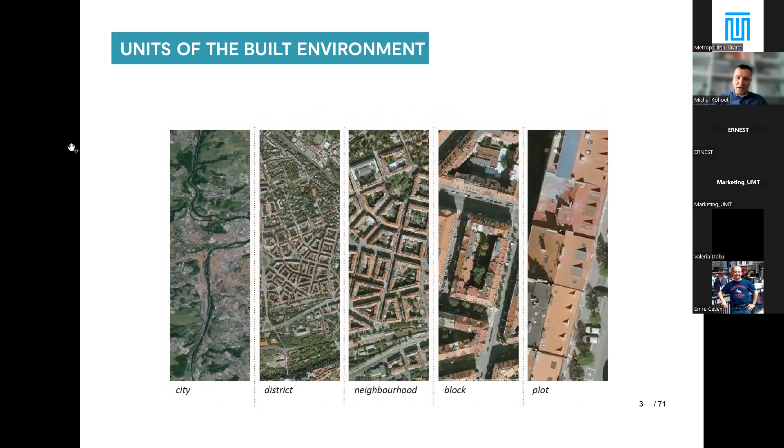But you can also see these lots, blocks, or these units not only as units from which the city is assembled, but also as scale levels of the environment, where the elements and themes of the environment are permeating all these levels, and different things are actually happening on these levels.

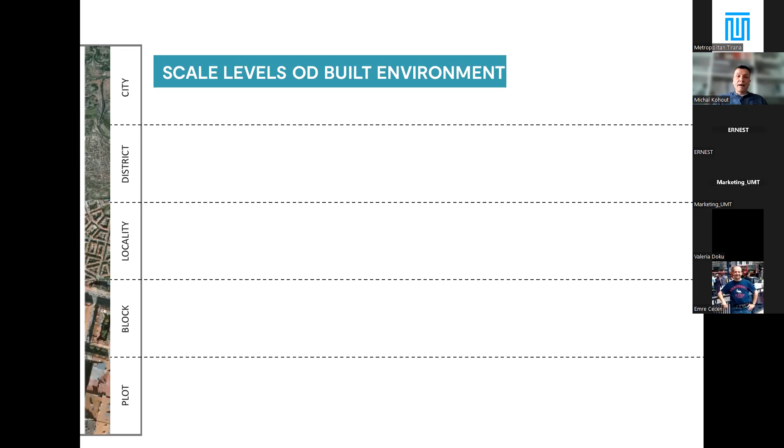So we can say that the elements from which the city is assembled are not only these units, but also some layers, and probably the most important layer of the city would be the public spaces. Then there is the building mass, civic amenities, all the infrastructural and mobility facilities, landscape, transportation. That would be kind of the primary.

You can, of course, come up with many other layers, many things and themes which are happening in the city, but those would be the primary if we are talking about planning. And then just to explain how different processes are happening at the different layers.

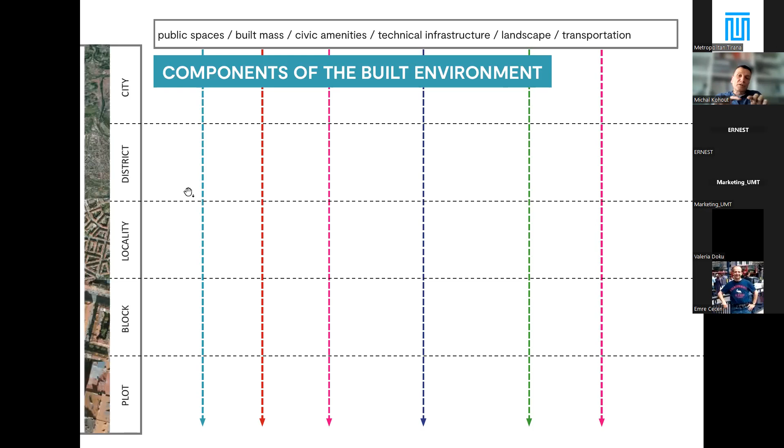I will show you, for instance, what could happen on the level of the district if we are talking of the public spaces. On the level of district, there would be some general idea being conceived, and then the establishment of the general street network in the sense of patterns, not really of individual spaces. And maybe there would be a spatial delimitation of the key public spaces, so it's really somewhat like a general concept.

And then if we go down to the level of locality, that's actually where the spatial delimitation of the basic street space is happening. And so that was a process which we already might call a description.

And there is maybe we are setting like the secondary permeability of the blocks. So basically at this level, there is a sort of general description and delimitation of the public spaces happening. And then one level further down, at the level of the block, we can already speak about certain parametrization of the public space and delimitation maybe of the inner block public spaces, if some of them are public. And we can already talk about how the secondary permeability of the blocks is actually happening.

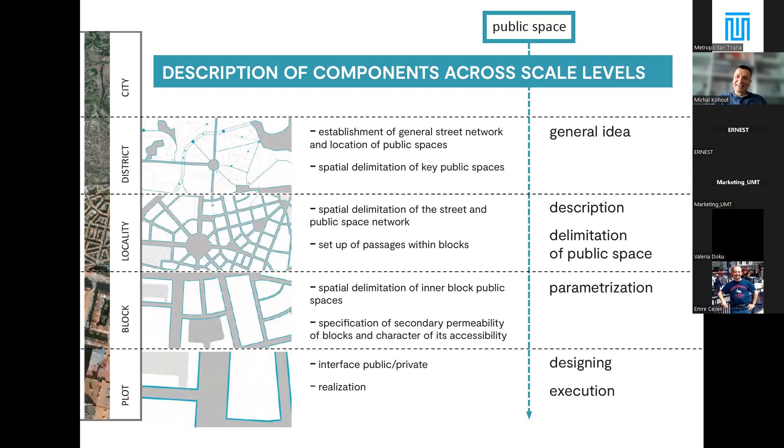And I will just show two examples of two different periods of the city development of Prague, where this mixture of these processes had a different balance, and there was clearly a different result. So one period is the first half of the 20th century, as I was talking about earlier, which I would call a coordinated development, where most of what we call a compact city was developed. Prague has a really unusually big historical core, that's what we inherited from the periods before the 19th century. But still, this period creates the bulk of the city, and we call it compact city.

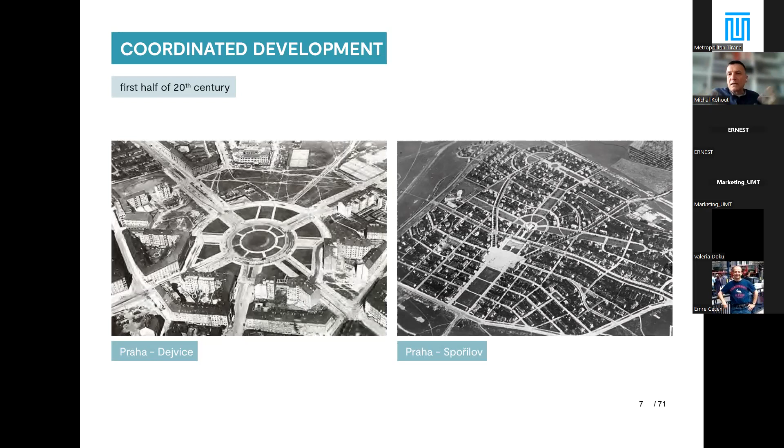And basically, the system worked in a way that the public authorities were the main development driver. They bought out the land, they designed the public spaces, they developed the infrastructure, and then they divided the land into what would remain as public spaces and what would be the buildable blocks, and they divided the buildable blocks, created different parcels, and they sold off parcels.

And that's basically how the city expanded, but also how it made money, and also how it formed itself. So there was a very high control by the public authorities of how the city would develop. There was a very high control of how the environment would look, because before selling off the parcels, the city also set up rules according to which the individual lots could be used.

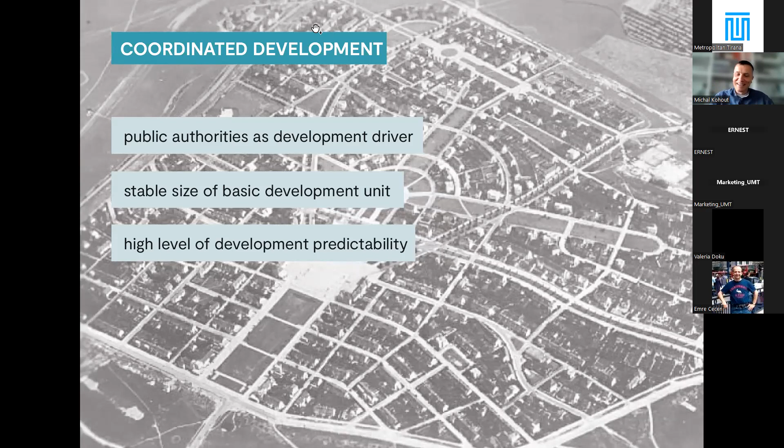So this was the situation in the first half, and basically it's a system which just slightly developed the system we inherited from the 19th century. So this is something which we probably know. This former system was based on a cooperation between the public sector and the private sector. And in the second half, what came was a slightly, or maybe dramatically, different

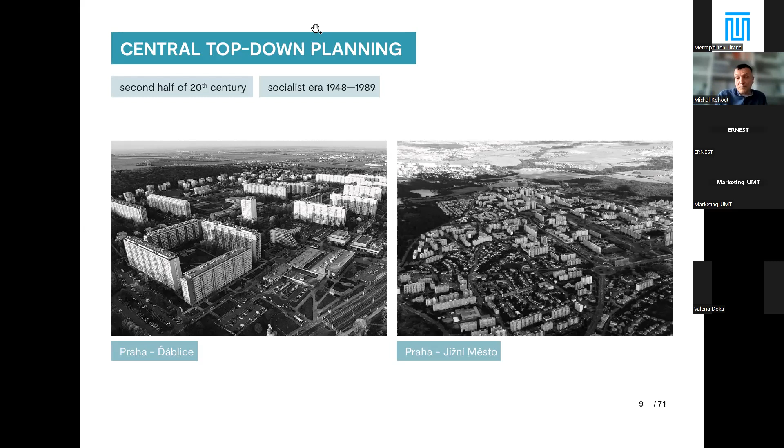system, and that was a centralized planning, top-down system, where basically the public authorities were not only planning the public spaces, but actually they were planning the whole thing. And they were not only planning, but also building. So the authorities were basically the sole developer and the sole actor.

I mean, it's slightly more complex than this. It's a slight simplification, but basically it worked like this. There was basically one developer, one planner, one contractor, and one operator also, a very centralized system of operation or management of the environment.

So this is a system where the designing process prevailed, and also there were very few rules for the construction of the buildings, because there was no real need for the rules, because there was one central control of the whole planning. So that created a very different environment altogether.

And here you can see what are the sort of advantages, but also shortcomings of this system. Because here, of course, this happened for a certain reason. The reason was that it was in a way more efficient to build this way. And it was also much easier to administer in this way, and there was a much higher control of the builder, that means the public authorities, about what was being built.

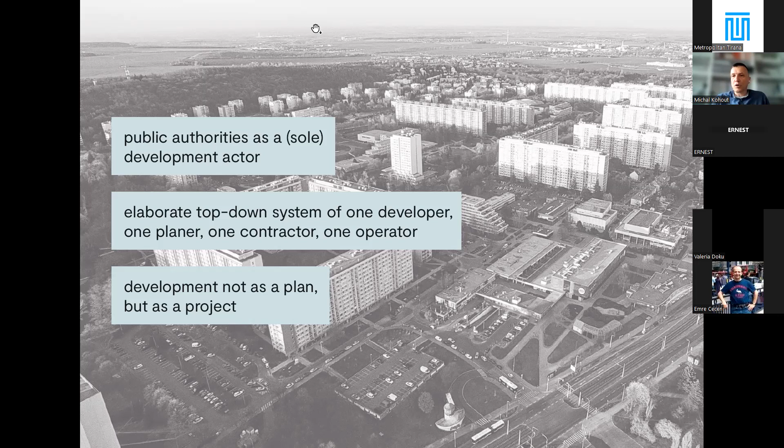So these would be the projects of our design company, which is called Unit Arkitekti, or Unit Architects, because we love the unit, we love the cell of the system, and we think it's really important that the fabric of the city gives certain autonomy to the individual cell, to the individual unit.

That being the house or the lot, it can be the block, it can be the locality, it can be the district. So each of these units needs to have its own level of autonomy, and also its system of how it's interconnected. Because then it actually creates an organism which can grow and thrive on its own. So that's, I think, very important to keep in mind when you are planning or designing the built environment.

So here I'm just showing the different projects which we were doing for Prague. I don't know if you see my pointer. Do you see the pointer? Yes, clearly. So this would be approximately the area where the compact city of Prague is, and this would be the outer ring of the housing estates in the city.

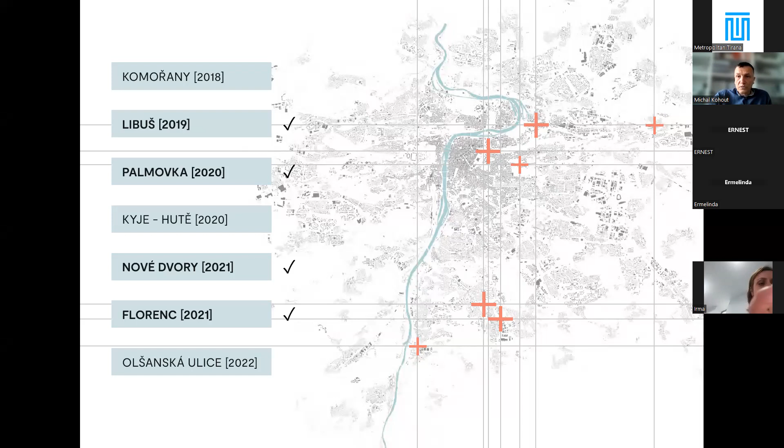Here there is a new metro line, the subway line being planned, and there should be a subway stop. So this place, which now looks almost like the middle of nowhere, will suddenly become a centrality for the whole neighborhood or this part of the city. It would be like a locality center, let's say.

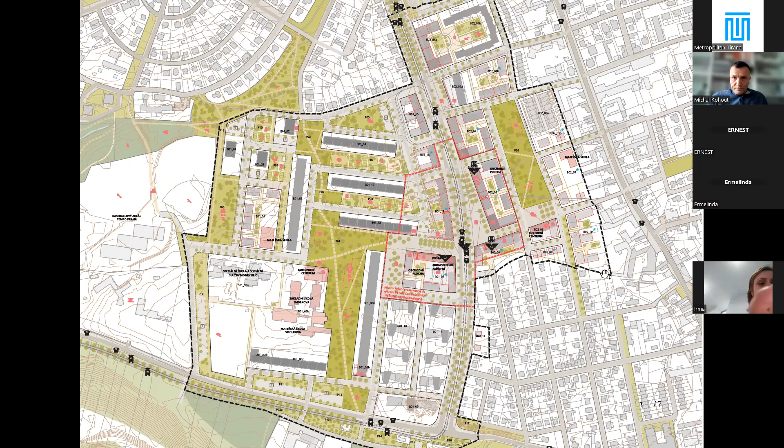And the land where at present there's only parking will also be built over, and where there is this open prairie-looking lot will be converted into a public park, and also the park will be lined with new buildings which would create the back of the blocks of the original village structure. Here you can see the original village lots and the arrangement of the village farmhouses. So this is more or less the design.

There was also detailed building regulation for each of the blocks. There was a different purpose given to each of the public spaces, this being the main stone square of the new area, and these being more or less pedestrian zones, and with the public park, which we consider also public amenities.

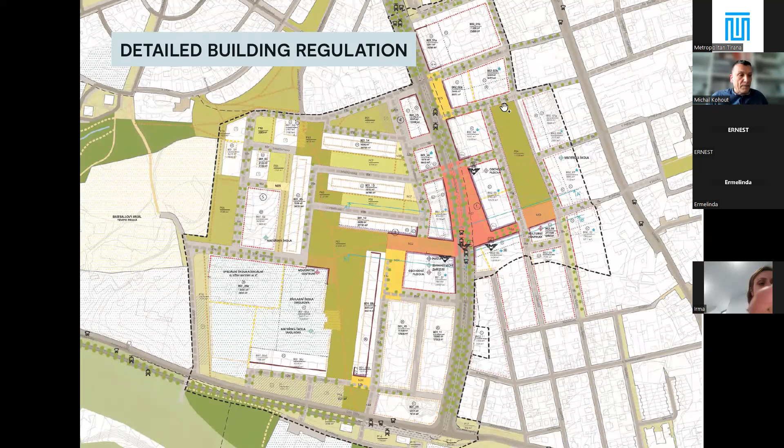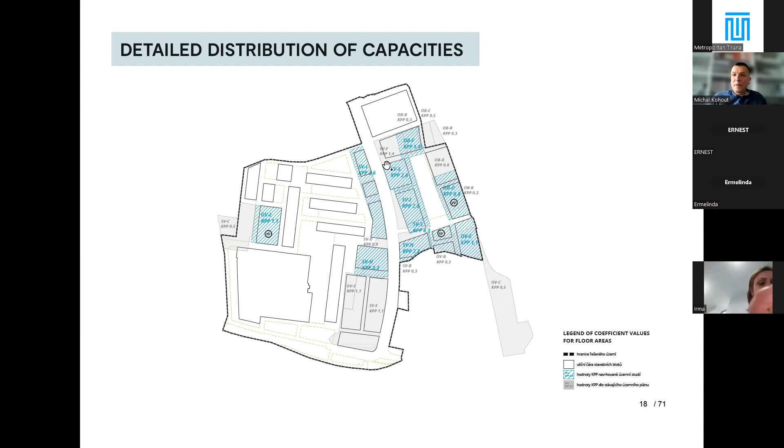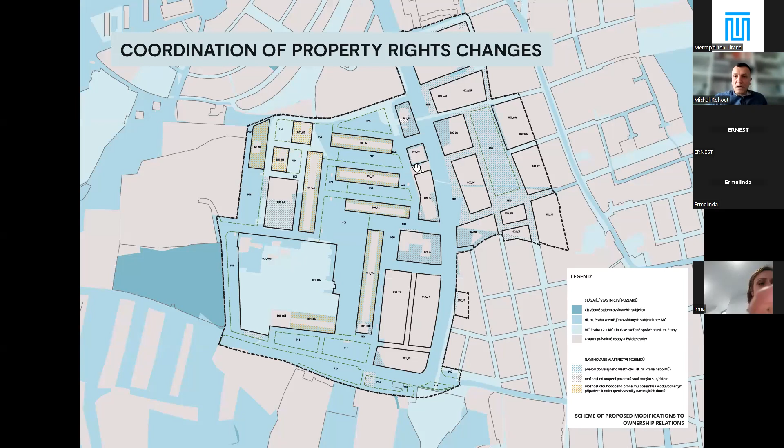What we were also planning was a detailed distribution of the building capacities, how much of what can be built where, and also coordination. There was a coordination of the property rights, because of course the property belongs to different actors, and you need to have a plan how you will deal with the property settlement.

And then there was also provision for the public amenities, kindergartens, where the main commerce will be placed, where the cultural amenities and community centers will be placed, a new post office, and also, of course, where the commercial amenities will happen, which is mostly on the ground floor, lining the main public spaces.

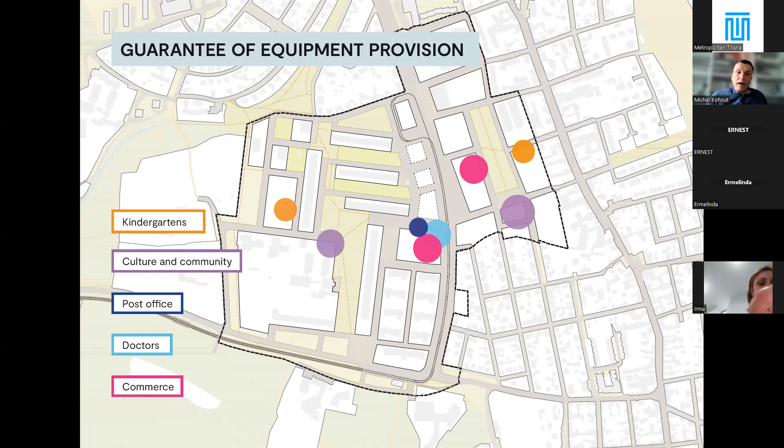So then what happened was that there was a book created, those are the rules basically for different build-up blocks that were created, separate rules, how the blocks can be used, what different uses will be there, how high and how much you can build.

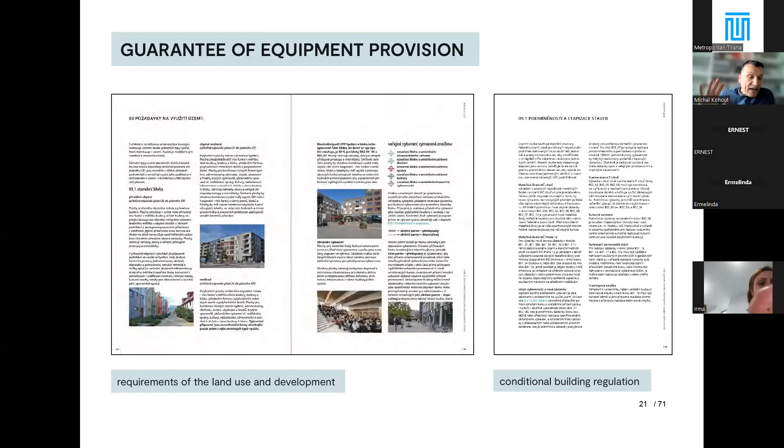Because this is very important, because if you do not create these rules, then the neighbors do not know what to expect from each other, and cooperation can turn into chaos and high competition, and then suddenly the overall character of the neighborhood is lost, and also the environment becomes totally unpredictable. So we don't want that. We want the character to be somehow intensive, but controlled to a degree.

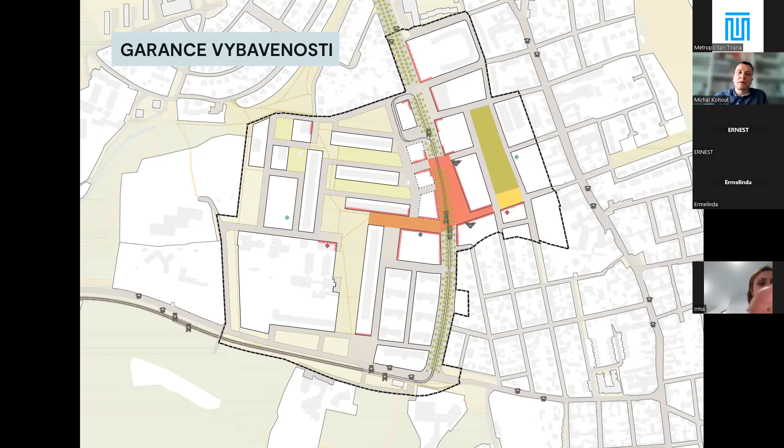Yeah. So here you can also see the red lines which show where the commercial amenities will be. So the policy is quite clear. The main public spaces align with the commercial amenities, and then as we spread out from the center, they become more scarce, and it's only the main corners which are accentuated not only as volumes but also with activity. So that's basically the first project.

The second project is somewhat similar. It's also very close, but this is the local district center. Libuš is actually a locality center, but here there is also a new subway station on the same line, but this is really the future center for the whole city district.

So again, this is the line, this is the stop where the Libuš development is happening, and this is the preceding metro stop, it's called Nové Dvory, which means like new courts or new farms, where it will be placed. And this is the area which it more or less covers.

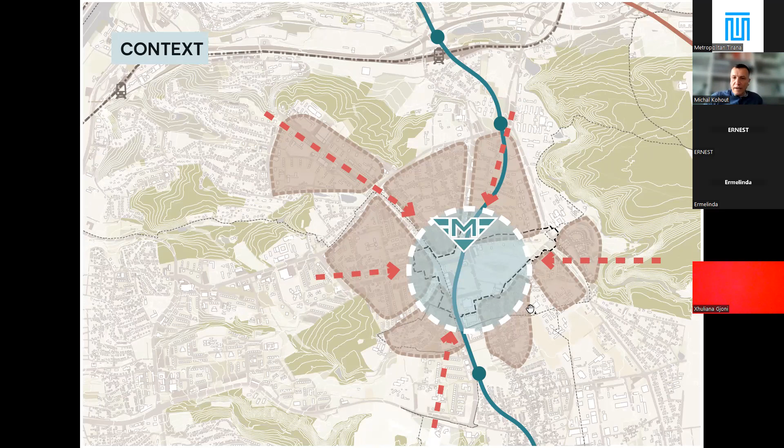So, and again, there are very different neighborhoods falling into the space or neighboring this space. You can see that again, there is the garden city development, there is here and here a housing estate, there is a big sort of public, it's not a park really now, it's like a jungle, a city jungle at this moment. And then there is a sort of high-rise development.

You can see that from the shades, and you can also see it in the 3D image. There's a high-rise development here, and there's also a water plant, a big city water plant here, so a big technical infrastructure building.

So basically, again, very different types of neighborhoods coming together, which are a result of very complex planning, where there was first supposed to be a garden city development plan in the 20s and 30s, and then it was totally converted during the time of socialist planning, and these new housing estates appeared in the place.

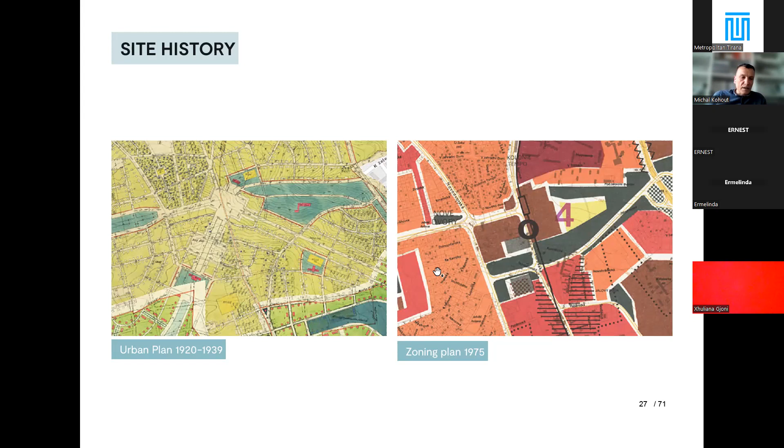And so what needed to be first coordinated is the public systems, so public spaces and the green infrastructure, the landscape infrastructure. Again, the public transport, this being the new metro line. Here are the main entrances to the metro line, and the red line here is the tram, which again has here a big loop.

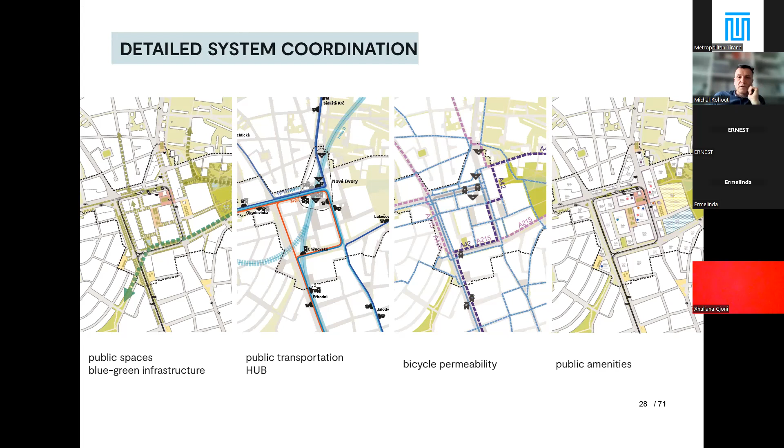And then what was also designed was the permeability for pedestrians and cyclists, and of course the public amenities, including devoting different public spaces to different functions, or giving them a different character. In a bigger scale, the blue-green infrastructure.

So you can see that what is happening here is that the city jungle was converted, or is supposed to be converted, into a proper city park. Neighboring that are the schools and sport facilities, and then this will be the real central location of this central neighborhood. So it's not only a central square, but a whole central neighborhood.

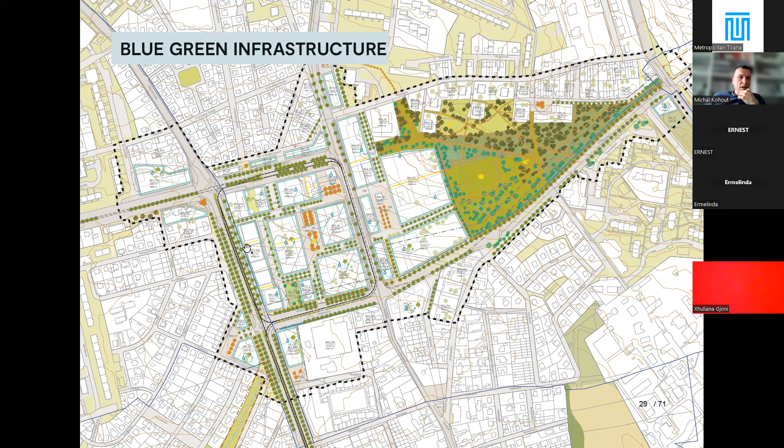And the most central of them is this big city block, which consists of many smaller built blocks. This is how it looks as a master plan. So there is an intention to divide the buildable blocks into smaller lots, which will later be used by different developers.

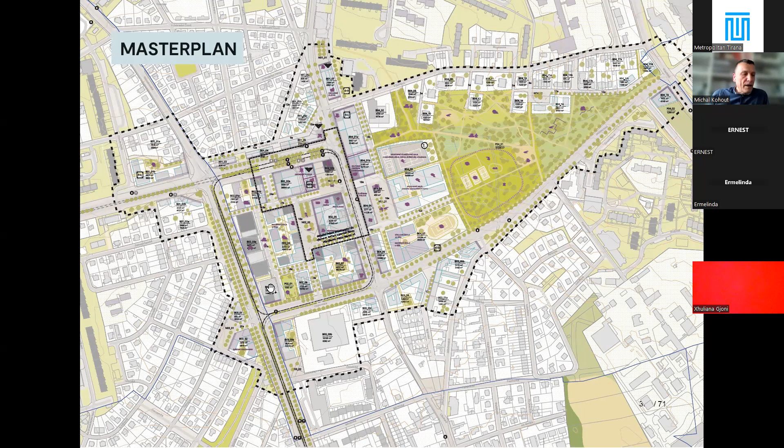What is also important here is that the city of Prague owns a big share of this central block. So the planning here is, in a way, much easier. Nevertheless, the system, the metro line, is already being built. So certain things are being planned in kind of reverse action, and what we are trying to do is also to integrate the exits of the subway station into the buildings and into the public transport, which happens on the surface, and their station.

So here, I should also point out, we consider this a regulatory plan. It isn't actually a design, or we don't consider it a design, but this is kind of an assignment for a design which should come later on.

So you can see that the planning is in a very detailed form and almost resembles a design, because simply the tram station, the bus stops, the roads need to be planned in advance. So the assignment needs to be really detailed in this respect. So one could almost think that this is a design, but no, we consider this a plan, and it's part of the regulatory plan.

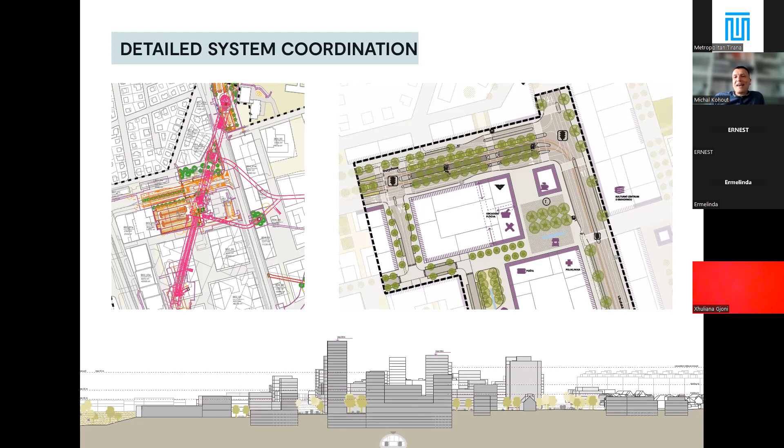And in order to actually fit things in and secure that there will be enough light and as many views as possible for the different users, we developed an elaborate system of spatial regulation, in which there is a certain basic height level, and then there is one level lower, where one can actually cover the built part of the lot completely.

And then from this level on, those who will be building on the lots already need to create certain holes or penetrations into the volume, so that light would go in and people could look out from the inner space of the block and would not feel enclosed. And then from the basic height level, there is another height level where the volumes are already much more scarce, and then there is a possibility for local dominants on particular spaces.

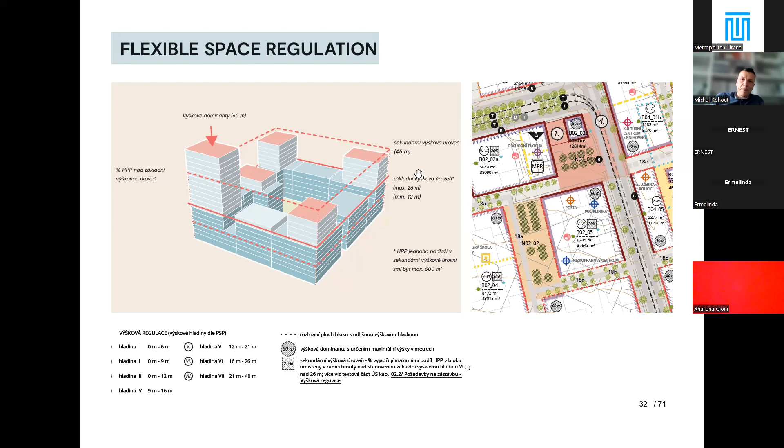So again, this is about how things are being planned. You give the rules, you talk to the actors, you set the scene for them to later on play out their own needs and development projects.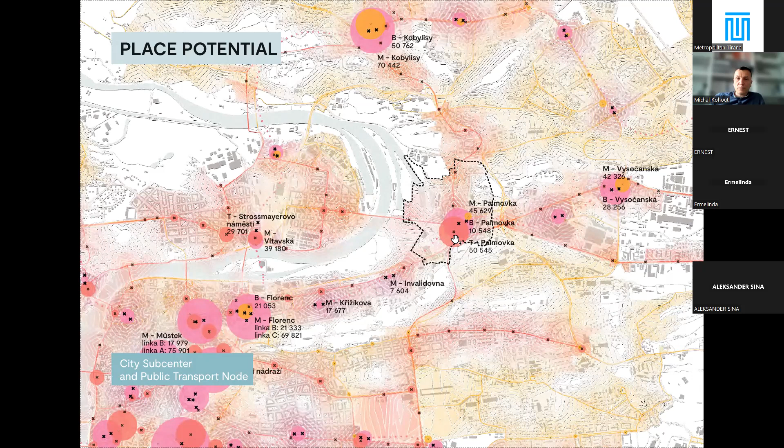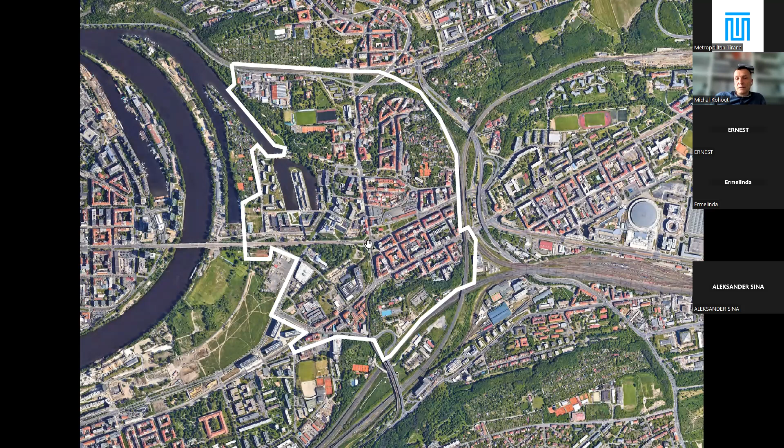And you can see different new developments going on in this area around here. But there wasn't enough coordination. So the city said, okay, we need to organize all these developments, coordinate between them, and we need to reorganize the system of the public spaces and of the traffic. And this was basically our task and our commission.

Again, this was how it was supposed to be planned in the past. There was quite a concise urban plan made for the area in the 30s, which was, as is kind of a standard in Czech 20th century development, then cast off, and it was substituted by a totally different concept, and that happened in several stages.

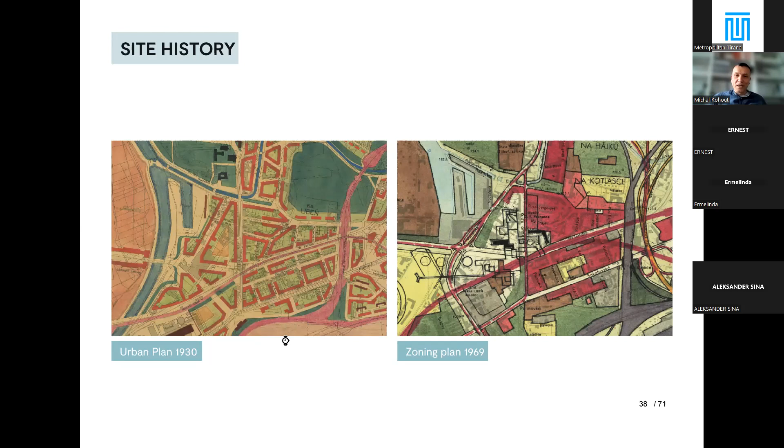So now basically the area ended up as this patchwork of different systems which do not really work together, and the area looks slightly abandoned. So although there is a subway station there, and in fact it has a great traffic potential, it looks really neglected. A lot of homeless people in the area, and it's in a rather poor state.

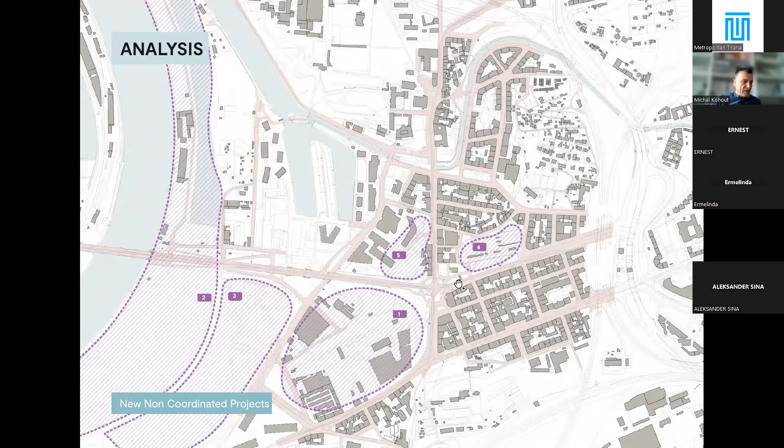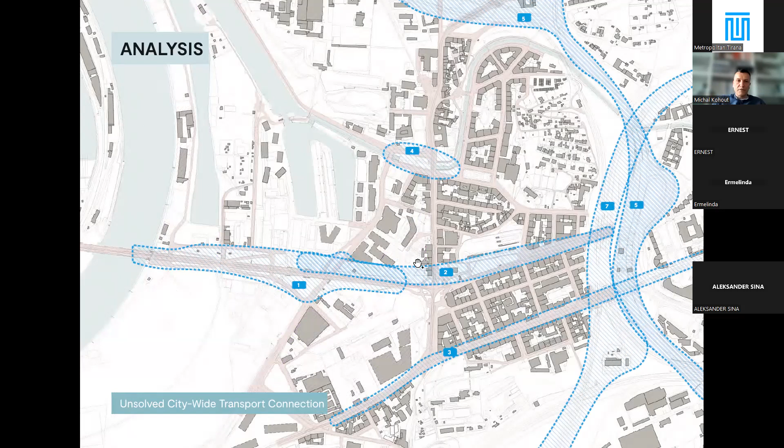So first what was done was an analysis. We were trying to see what are the areas where new development is happening and what actually needs to be coordinated. What are the main traffic and city transport elements which are going through the area, and what limits they pose on our development. And then, of course, there was also the more fragmented ownership structure here, which we needed to deal with.

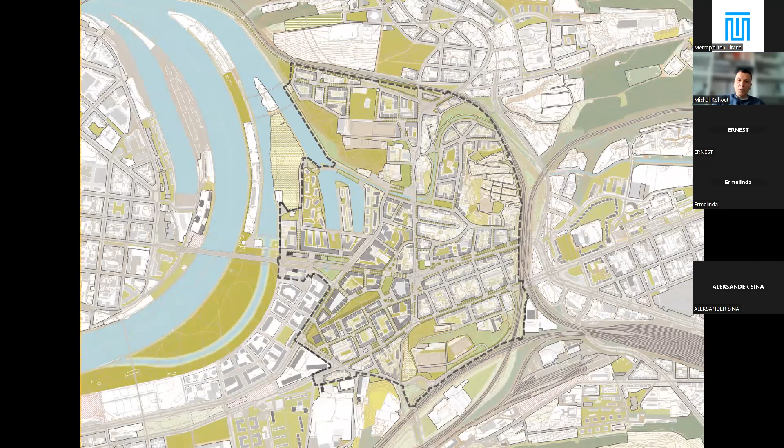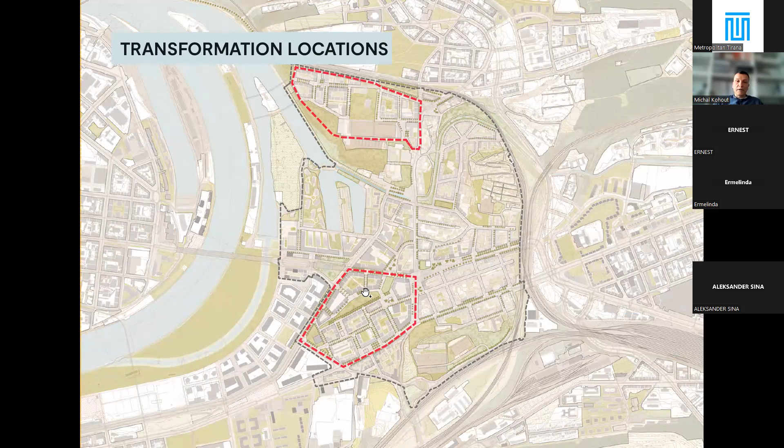And this is already the proposal with, again, a system of public spaces and built-up blocks. And there are two areas which will be, or which are being designed in a more detailed way. There is the northern part, and then there is this pentagon in the southwestern part of the whole area, and we will concentrate more on this area.

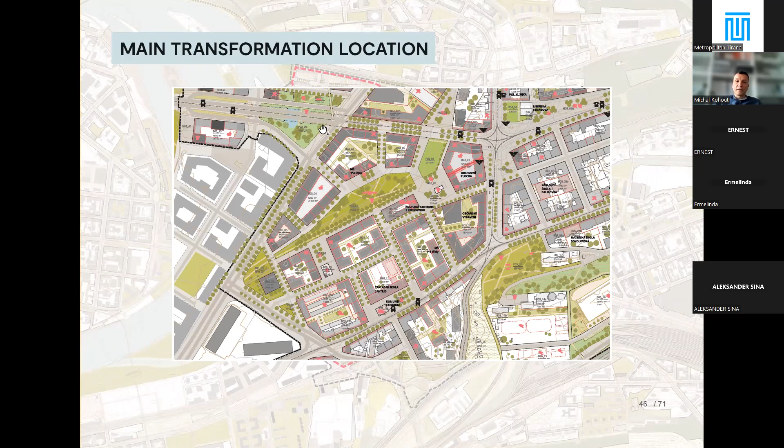Here, again, is the functional division of the areas, which was designed here in a more detailed way than elsewhere, because this is the area where the city actually wants to start its development very soon. So the lots are already being divided, and it's already being determined which lot the city will later use for its own development, what kind of development the city wants to happen in these areas.

So there will be social housing, there will be co-ops with the share of the city. There should be Baugruppe, that means groups of citizens to which the city will sell off under certain conditions. And there will be also a commercial development in the area. So it has already quite a detailed system. And of course, there are also administrative buildings, and there is a shopping center. So it has quite a detailed structure of what will happen where.

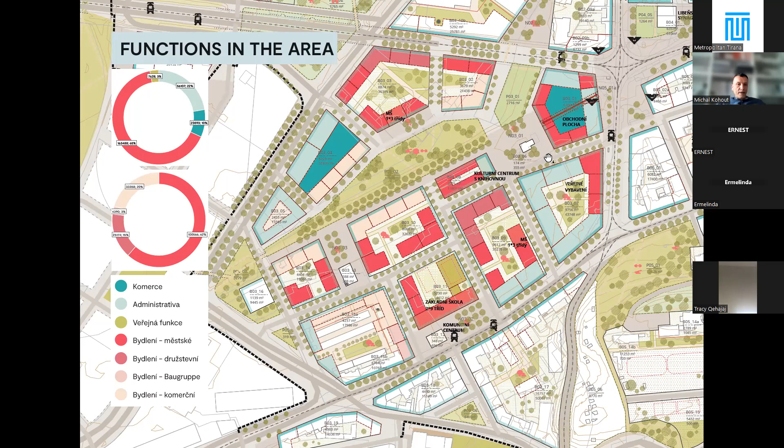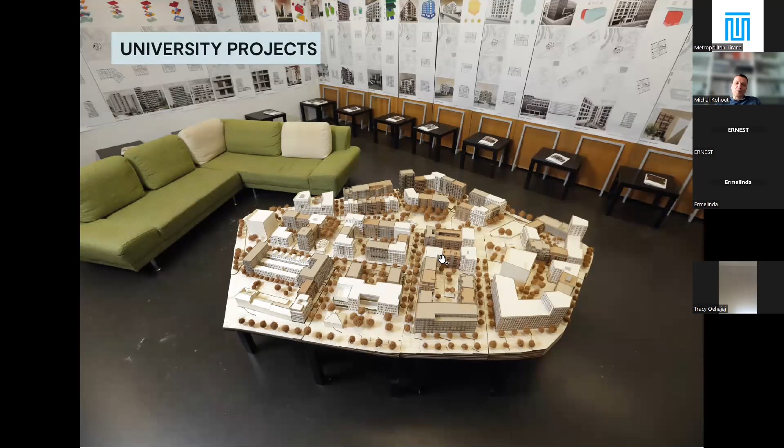And then we also worked, maybe it could be interesting for you, we tried it out with our students, how it will work. There were something like 60 student projects done for the area, and the students were trying to design different buildings for the assignment which is given from the plan. And they were also trying to design school facilities and kindergartens and the commercial facilities.

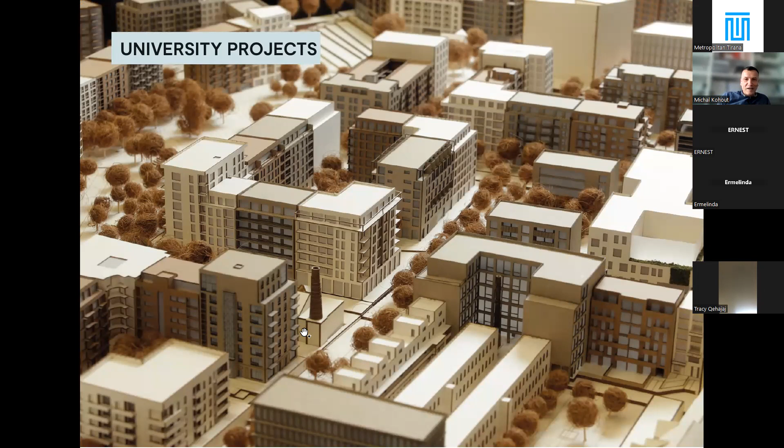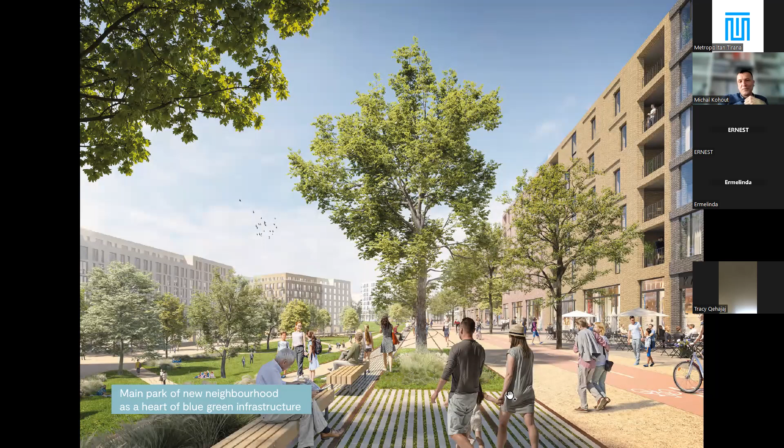So this is how it is supposed to perhaps look, with, for instance, the chimney of a former factory, which is standing here as the sign of the past of the neighborhood. And this would be how the main park of the area is supposed to look. This area actually is also a former railroad track, and you can see that the tracks are used as a feature of the design.

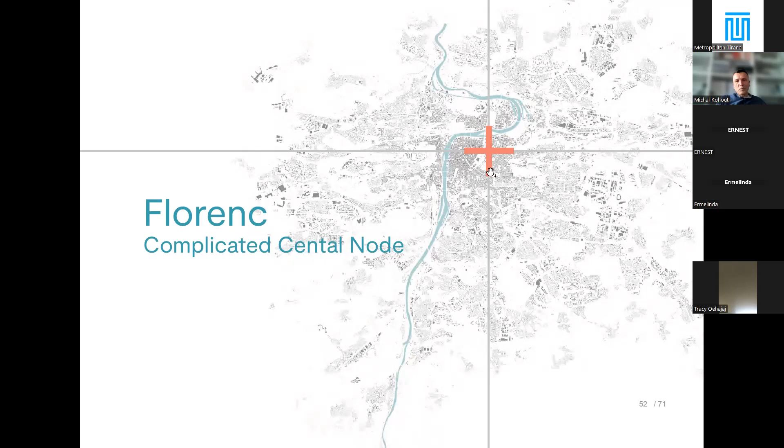Anyway, the last project, which I will go through hopefully very quickly because we are running out of time, is a design of a very complicated central node of the city, which is probably one of the most complicated areas in the city. It's basically where the city walls used to run. It's somewhere along this line, and it's an area where several, but two main development systems meet.

It's that of what we call the New Town, but the New Town was actually founded in the 14th century, so it's a pretty old new town, and then there is this early 19th century suburb of Prague, which is called Karlín, and these two development systems clash in this area, and into this slot between the two neighborhoods, all the different traffic systems tried to fit in the past. So the first railroad tracks which were placed in Prague are here. It's this line. This is the first Prague railroad station.

Then there was another railroad track added in the mid 19th century, another one after that on a completely different level. Then there is a city automobile highway, an inner city highway running through, and then there is this being the subway. There is a tram line running on this street, and to add to all the mess, there is a bus. The central bus station of the city of Prague is the area, the purple area here,

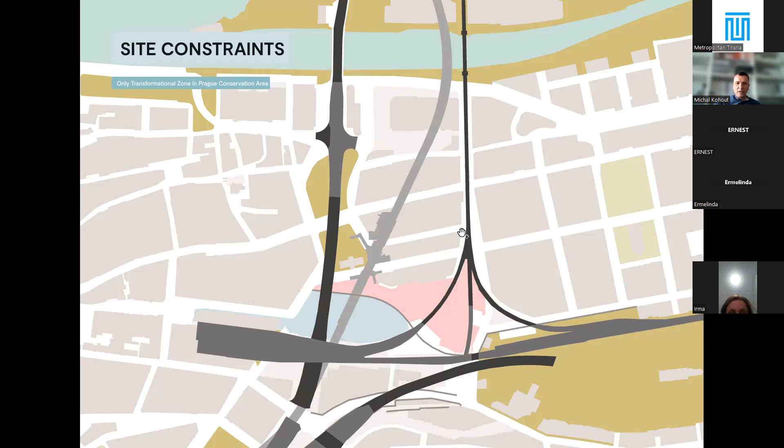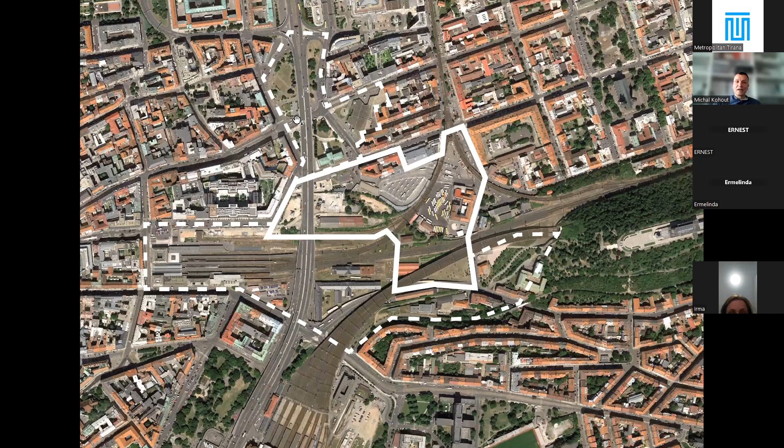You will see it again in a 3D view. Bus station, the main highway, the first train station here, Prague's main railroad station here, the higher level of the rails, the lower level of the rails here. And then to add to all this, there are also new rails being planned here into the hill from this level, under this level, and into a tunnel.

So fairly complicated area. Basically the two big developers and the owners, the bus company and the other developer, were building on the rear sides of the area. And then as they were getting closer and closer to the center, they suddenly realized that they are unable to coordinate themselves, because of all the complications and all the connections which had citywide repercussions, simply they could not coordinate.

And they asked the city to somehow be their arbiter, and the city said, okay, we will do it, but we want to work with an architect who will win in a competition. We want to launch a big city planning competition, and we want you to commission this architect who will result from the competition. You will take him as your architect, who will be doing the planning for you, and then someone else whom you choose might do the designing of the individual buildings.

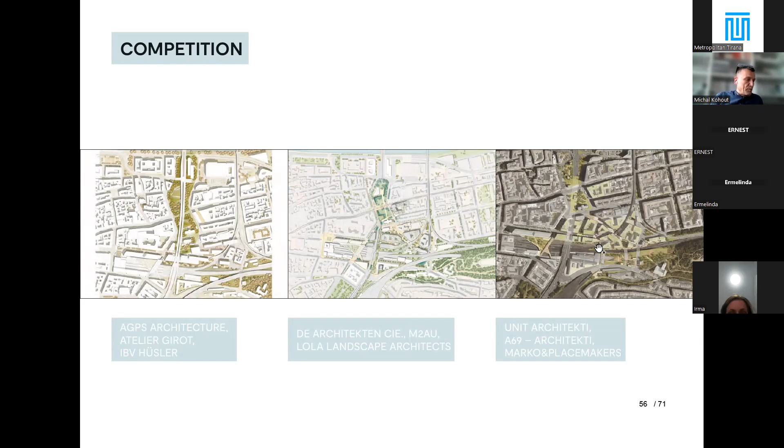So we participated in the competition. We won the competition, and basically this is our competition entry, and the principle of the competition entry is basically the following. We said, okay, we need to include the green areas, somehow connect them, this park and this park on the hill, and create some sort of connection of the green axis.

We need to have some integration of these 1, 2, and 3 big neighborhoods, which are now separated. We want to have an understandable urban tissue, and we have to respect the infrastructural constraints which are set, but we will approach it in a way that we will create a separate small neighborhood, a mini neighborhood, which will consist of small blocks and a system of lots of small public spaces,

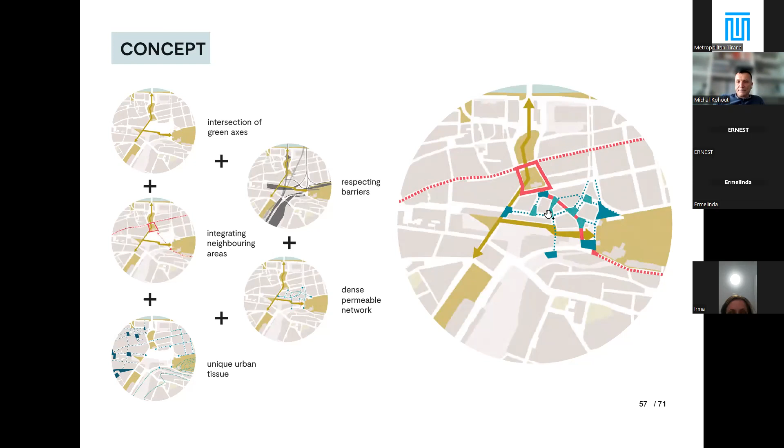which would be basically like an open air shopping mall, one can say, with administration and living above it. And it will integrate the bus stop, and it will integrate all the other traffic which is happening on the site. So this was the basic idea. This is how it's like. I won't go into this, but I will show you the result.

You can see that these are the small blocks which we created, which still have a sort of scale and still are divided into different buildings. Some of them are bigger, obviously, because they are covering the bus station. Some of them are even running over the rails, so that there is enough of the urban tissue to actually be a small neighborhood.

Some are running over existing rails, some are running over the planned rails, and again, by that we are integrating these infrastructural elements, and some public spaces are going under the existing rails, under these rails and these rails, so that basically you have the urban tissue which would go through these big infrastructural lines.

And the pedestrian would cross over the area without kind of noticing that you are maybe going under or over railroad tracks, because they would be over, or that you are shopping actually above a bus station, because these would be simply integrated. So this was the main principle and the main idea. Let's design the city for the pedestrian, and let's integrate these things.

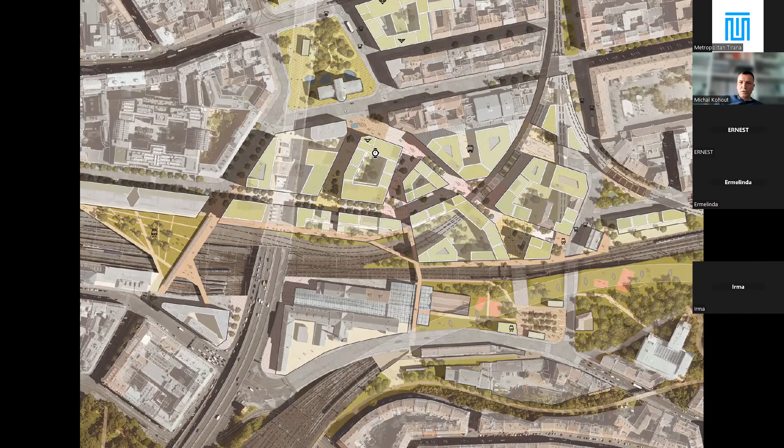Let's have again a very dense but very friendly kind of neighborhood. This gives you an idea how it should look on the level of the pedestrian. It shows the different levels of the public spaces which need to be integrated. This being the basic level, then this is the level of the rails, the one level of the rails, and this coming up into the areas which would cross the rails.

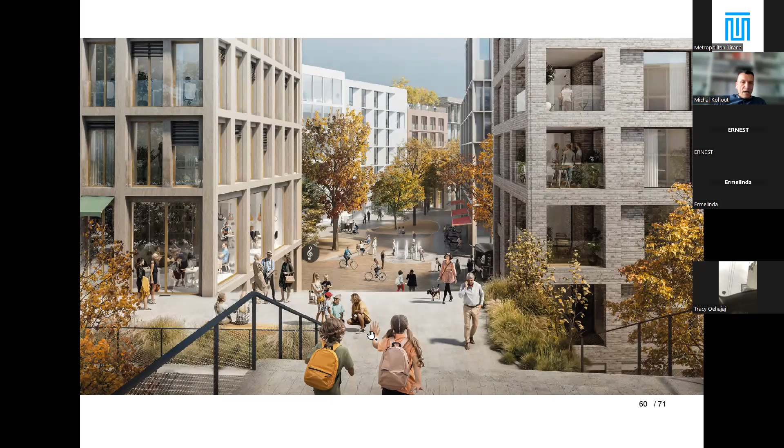And this is how the whole thing looks from the top. So you can see it's as though the infrastructure almost wouldn't be there. You notice it, but it doesn't bother you, and most of all, it doesn't create an obstacle. It doesn't create a barrier. So we are respecting it. It's there, but it's not being a barrier. That is the main idea.

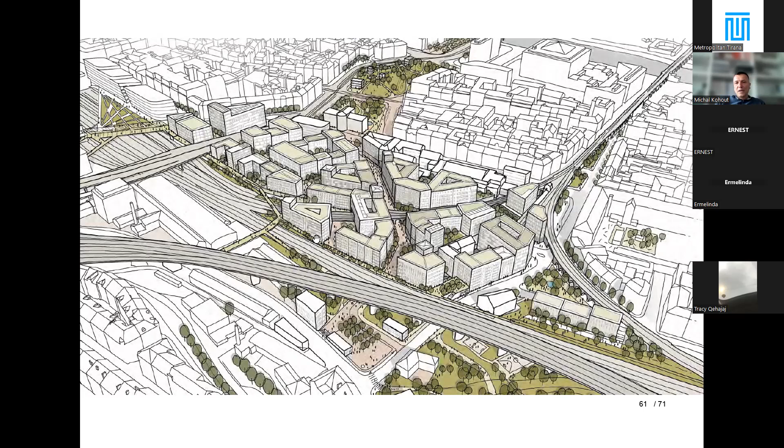And again, the bus station, this would be, for instance, the bus station. You can see it looks like an administrative building with facilities downstairs, but in fact, in the basement there is a bus station. But on the level of the pedestrian, you don't even notice it.

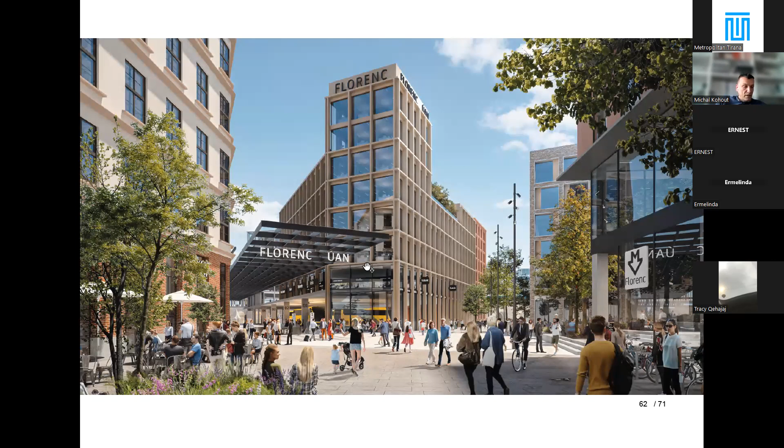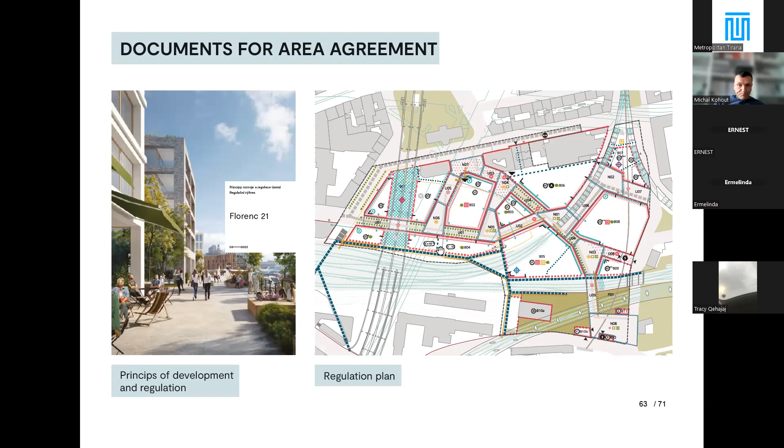And then I won't bother you with this, but after the competition, we did a documentation for the area, with a very, very detailed plan, because here we are talking already about maybe not centimeters, but definitely decimeters, about how things are coordinated, what stops where, who can build where, how much, because otherwise, without this detailed planning, the subsequent stages of the design just wouldn't work. So this is basically it.

So for instance, the parking needs to be planned. These marks show that the different blocks have a compound, because the underground is so small that it wouldn't be efficient to contain, for instance, parking separately. So we needed to create a bigger underground for certain parts of the block. So basically we are planning on many levels above each other.

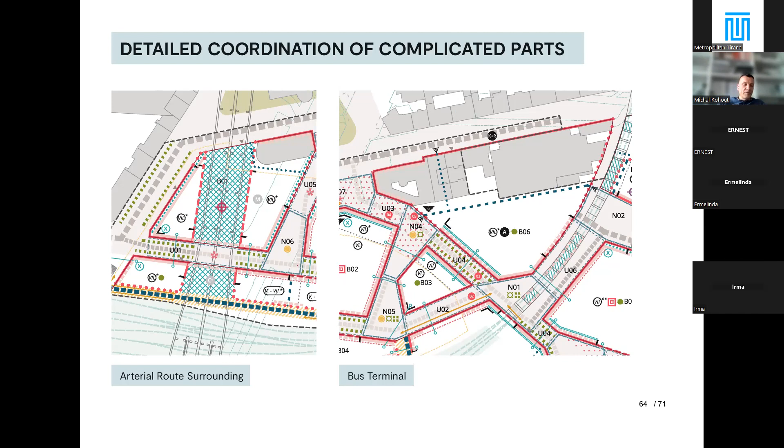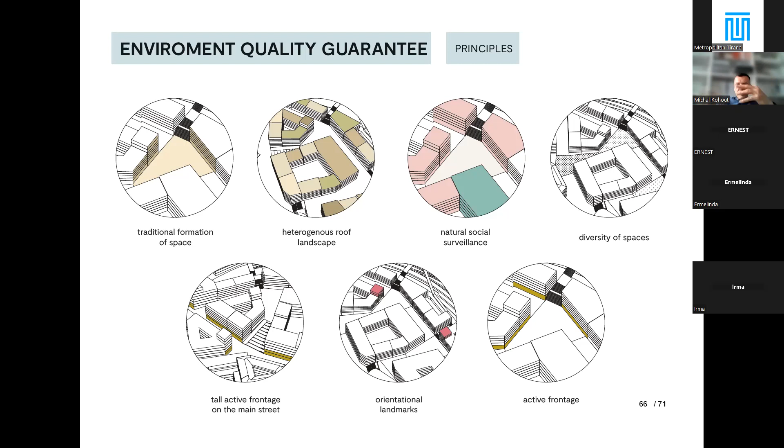And this is more of the same, and this gives you an idea of the guarantee of the quality of the environment through these rules, which secure that the design of individual buildings can happen, and the different builders can have their initiative, but the initiative is within the frames given by quite strict constraints, which are not arbitrary, but stem from a really complicated situation of the site.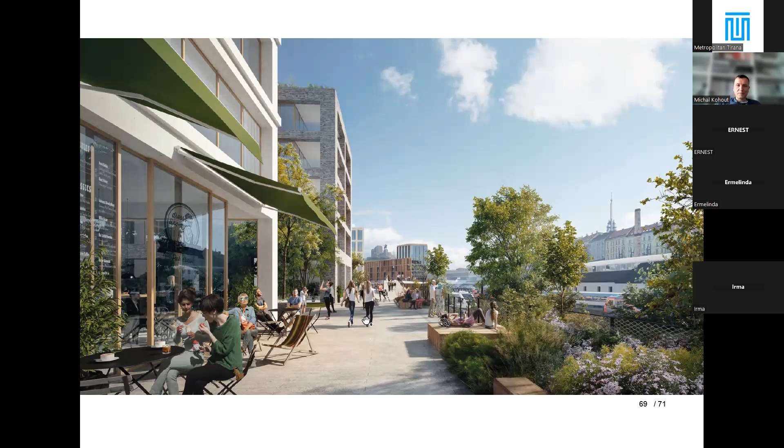This is again how the area should look. This is a promenade facing the present train station, or the tracks of the train station, with people watching the trains coming in and going out, and in the background, the hill which I was showing before, and you can see how the terrain is actually going up, and this already being the area +6. So we are already above certain other areas. So it's like a complicated mess.

So the basic message is that the city, yes, it is designed, but mostly it's designed by the different stakeholders, which usually represent the private sector, but the city has to be planned. And who's planning the city? The city is being planned by the city. Basically, the public sector has to take the initiative in planning. I mean, again, I don't want to make it like an absolute statement.

There are cases where the private sector can also plan parts of the city, but there need to be very good conditions for that, and the planning culture needs to be of a really high level to permit this. Otherwise, at least the experience in my country is that it is impossible to achieve the level of coordination which is needed for what we need now. That means a compact, but high quality environment.